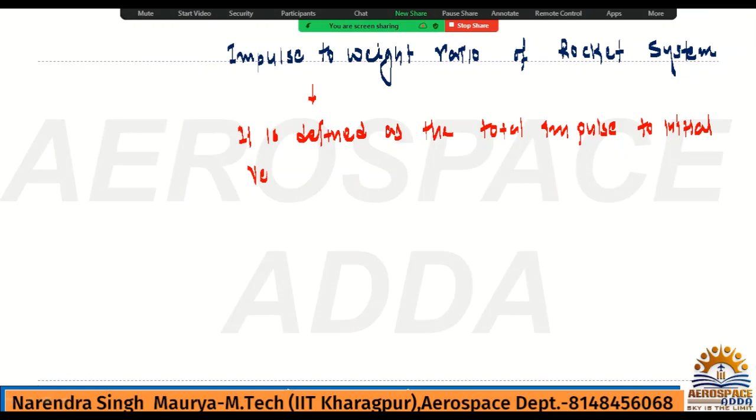So it is defined as total impulse to initial vehicle weight. Okay, so if I say initial vehicle weight, that means that rocket is now going to lift off. So the propellant of the rocket, you can say it is going to start burning now. It is not yet started, yes or no? So in that case you have to take...

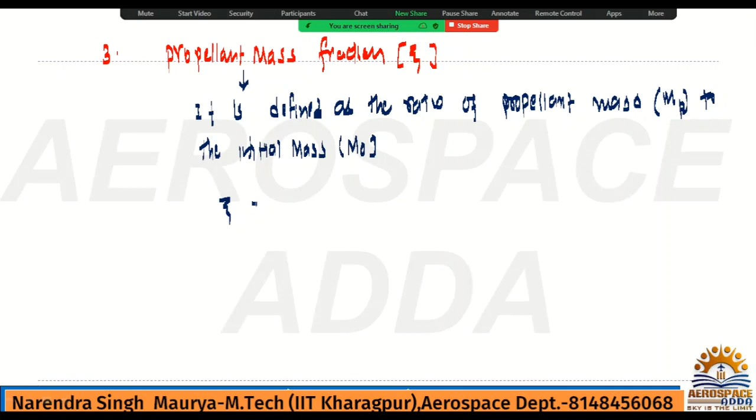So what is the propellant mass fraction? It is defined as the ratio of propellant mass MP to the initial mass M naught. In bracket I can write, propellant mass is MP. So zeta is nothing but mass of the propellant divided by initial mass of the system.

What is the mass of the propellant? Here you can check. Mass of the propellant MP will be M naught minus, in bracket, ML and MS. Yes or no? Or in other words you can say it is MF. MF is the final mass after rocket operation.

Even though after rocket operation we will have mass of the payload and mass of the structure, yes? We are considering that payload is not launched. Don't think that after rocket operation we have pushed the payload, like a satellite, into orbit. No, just think of it as before rocket operation and after operation mass, related to the mass of propellant.

If I say before rocket operation, it means mass of propellant is still there, not completely consumed. If I say mass of the system after operation, it means the propellant is completely consumed. That's the meaning of it. So MP will be 0 at that time.

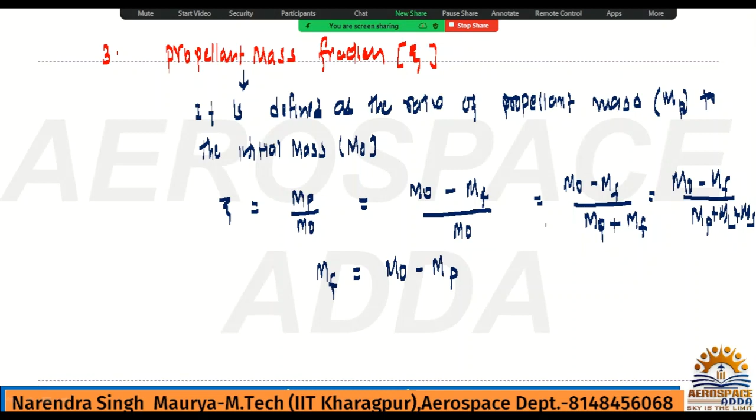What is the initial mass? Initial mass is nothing but mass of propellant plus mass of payload plus mass of structure, or you can write MP plus MF. Because final mass is nothing but initial mass minus mass of propellant, since that part is deducted after operation, as the propellant is now completely consumed. So remember, final mass is always initial mass minus mass of propellant. So wherever mf is written, that is its meaning.

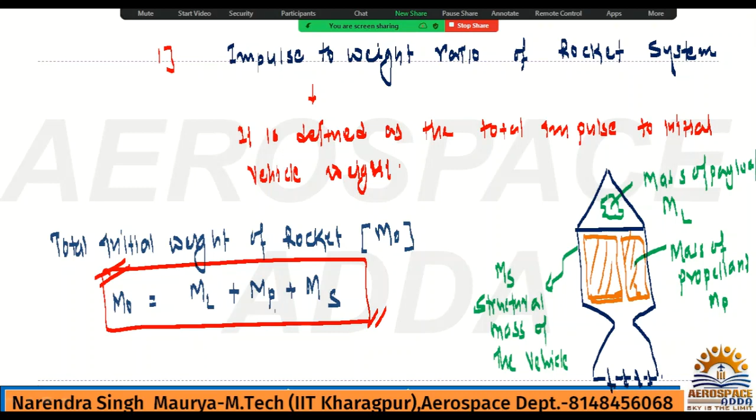M naught is nothing but mf plus mp. So this part here I have written this. This initial mass, you also know very well, it is nothing but mass of the payload plus mass of the propellant plus mass of the structure. So what is m naught? Ml plus mp plus ms. So the same thing I have written here also. This thing needs to be careful, otherwise while solving numericals you may get so much confusion. Each and every line you need to understand.

Now another format also you can have, because from a numerical point of view this is very important - the propellant mass fraction. What I told you is that propellant mass fraction is nothing but mass of the propellant mp divided by the initial mass of the system, m naught. And mp is nothing but m naught minus mf. So it is m naught minus mf divided by m naught.

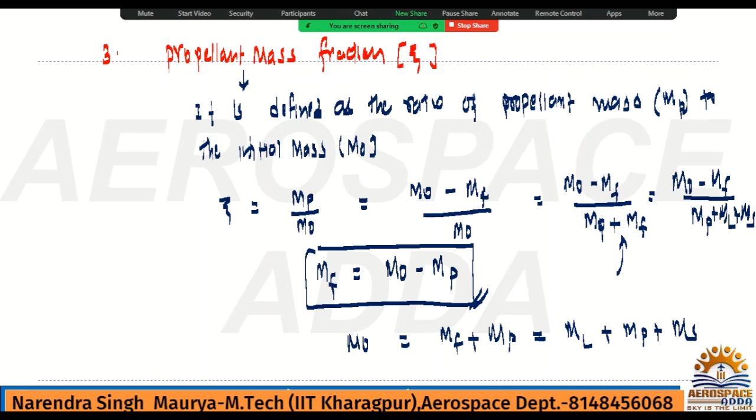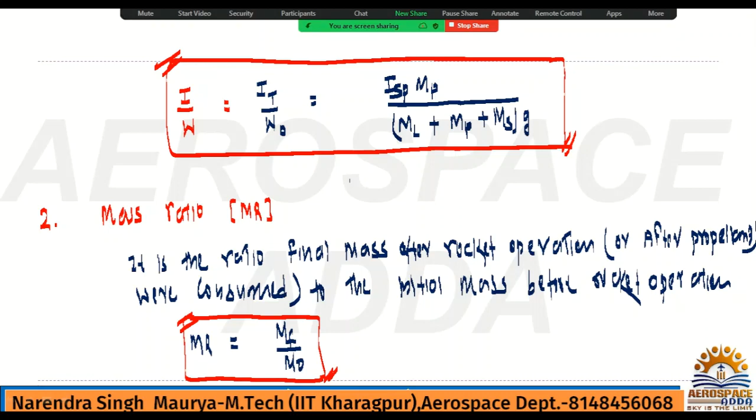Now here you can break it again, and you will get one more formula. Taking m naught by m naught separately, if we check, it is nothing but 1 minus mf by m naught. So zeta is nothing but 1 minus final mass by initial mass. Check what is final mass by initial mass - mf by m naught is nothing but mr, which is called mass ratio. So this is 1 minus mr.

This is very important - a very important result, and it is very useful for numericals. Numericals based on this are 100% asked in one day exams. If you go for separate exams like ISRO or GATE, you may get numericals based on these formulas. Whatever I'm explaining is very important for all exams.

So zeta is nothing but 1 minus mr, where zeta is propellant mass fraction and mr is mass ratio. Now you can see that mr is always less than 1. Why? Because m naught is always greater than mf. What is m naught? It is before operation, so mass will definitely be more since propellant mass is still there, but mf is after burning. So it is very important - mr is always less than 1, and you can draw the plot also.

Plot is not required, but you can draw it if you want. This is the propellant mass fraction, and it is always positive. Based on variation of mr, you can draw zeta also, since 1 is constant, so as mr changes, zeta will change, so you can draw the plot. For the one day exam, definitely graph-based questions will not come, but during your BTech semester you might have solved numericals based on such plots. Here it is not required actually. Anyway, this is what propellant mass fraction is.

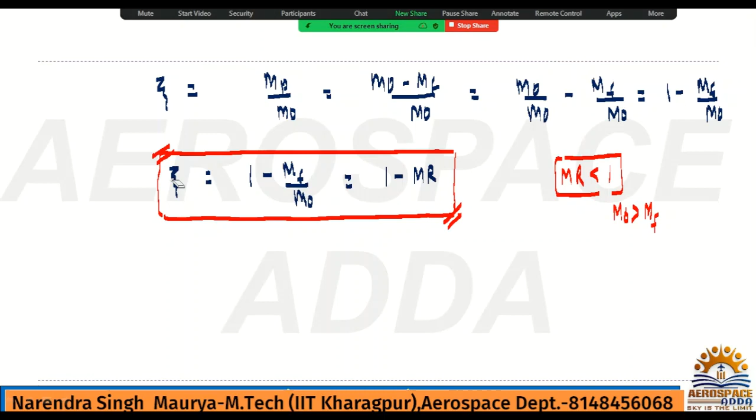Now we'll go for the next topic, but first there's one problem we need to solve here, and then we'll move on. So we have a problem based on this performance parameter - this is problem number 1.

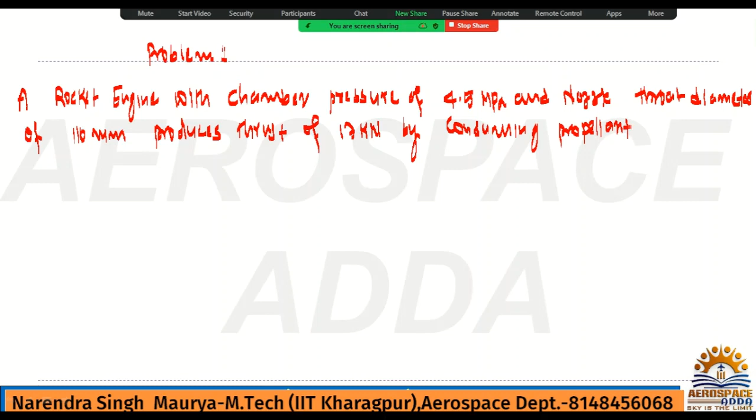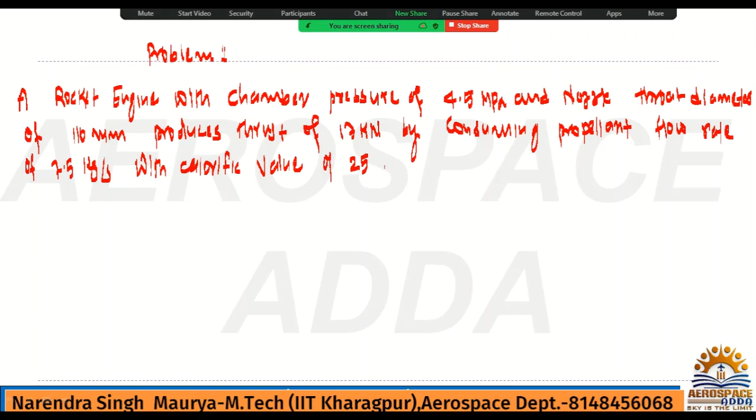A rocket engine with chamber pressure of 4.5 megapascal and nozzle throat diameter of 110 mm produces a thrust of 17 kilonewton by consuming propellant at a flowrate of 7.5 kg per second, with a calorific value of 25 megajoule per kg. If the flight velocity happens to be 850 meter per second,

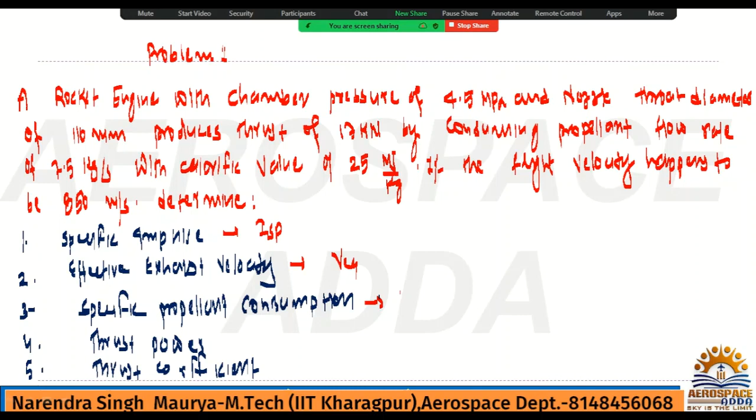determine: number 1, specific impulse; number 2, effective exhaust velocity; number 3, specific propellant consumption; point 4, thrust power; point 5, thrust coefficient. You know specific impulse is denoted by ISP, effective exhaust velocity, SPC, thrust power - TP, and CF. Thrust power you can also say FP if you want, it's your choice.

Check here: 4.5 megapascal is given - chamber pressure is 4.5 megapascal. Throat diameter, you can say DTH, is 110 mm. The thrust they have given to us is 17 kilonewton, and mass flow rate of propellant m dot p is given as 7.5 kg per second, not 17.

7.5 kg per second. Okay, calorific value means here they have given us CV, that is the calorific value, which is nothing but 25 megajoule per kg, and last is the flight velocity they have given us. It is how much? 850 meter per second.

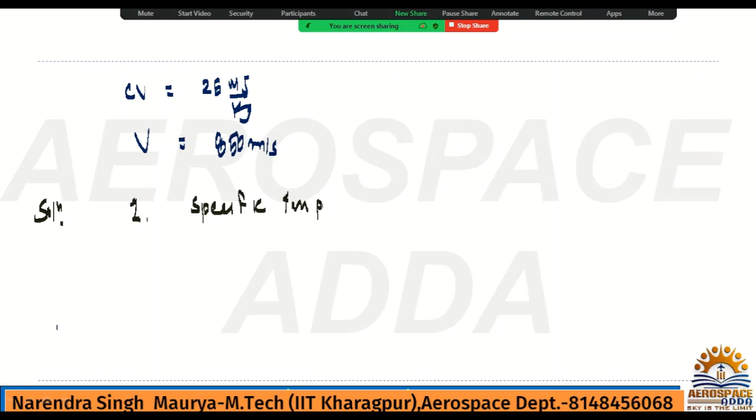Okay, so now the solution for this problem is simple. Number one, what is number one? It is specific impulse. What is the formula for this? It is ISP. ISP is thrust F divided by m dot p into g. What is the thrust? It is given as 17 kilonewtons, so 17 into 10 power 3.

M dot p, mass flow rate of the propellant, is given as 7.5. G they have not given, but you can consider 9.81. If you solve this, approximately you will get 231.06 seconds. So this is the ISP. This is number one.

All right, now we'll go for number two. What is number two? It is nothing but effective exhaust velocity. So what is the effective exhaust velocity? As you know, it is nothing but ISP into G. Check that formula box I had given, where many formulas were there. I had given ISP is equal to V equivalent or effective velocity by G. So what is V effective? It is ISP into G.

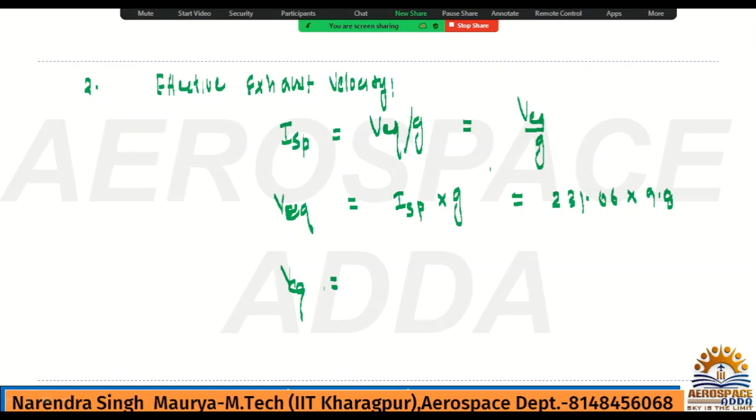So what is V effective now? V effective is nothing but ISP into G. What is the ISP? You calculated 231.06, into 9.8. If you do this calculation, approximately you will get 2266.7 meter per second. This is the value.

Please check the value of this formula. If you remember, we had proved ISP is equal to F divided by m dot p g. If you check F divided by m dot p into g, what is F? F is nothing but V equivalent or effective into m dot p, divided by m dot p into g. M dot p cancels out. So what you will have is ISP is equal to V effective by G. So you use that formula. Okay, it is very tough for me to remember the formula, but anyway.

Alright, so this second value you have calculated. Now we'll go for the third value. What is the third value? Third value is specific propellant consumption, it is nothing but SPC. What is the SPC? I had given one formula, it was very large in the box, many formulas I had given for SPC, but finally if you remember it was 1 upon ISP. What is the ISP here? It is given as 231.06. If you solve this, what you will get is 0.0043 kg per Newton second. This is number 3.

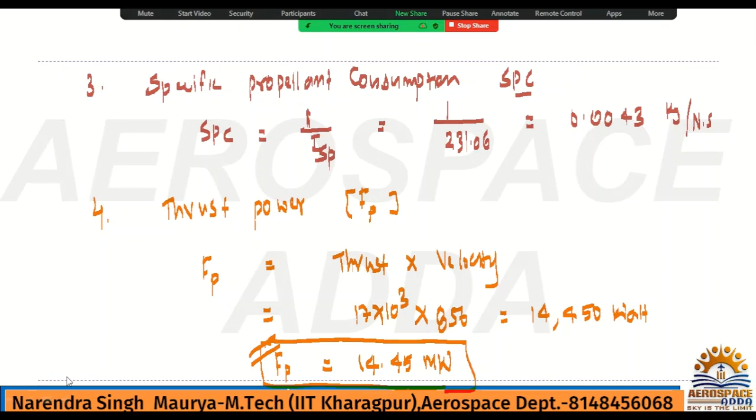This is number 4. Now we'll go for number 5. So what is number 5?

Number 5 is thrust coefficient, CF. By formula, CF is nothing but thrust force divided by PC into ATH, throat area. What is the thrust force? It is 17 kilonewton, given to us. Check 17 into 10 power 3 divided by PC.

If I am not wrong, it was 4.5 megapascal, check it. And diameter is given as 110 mm. So we'll write 4.5 megapascal, so 10 power 6 into area, which is pi by 4 into diameter 110. Convert 110 mm into meter, so it is 0.11, pi by 4 d square. If you solve this, you get 0.3975.

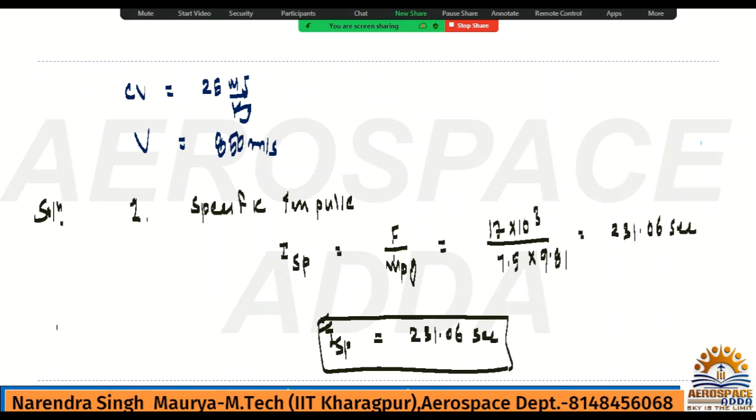One more you can add here in the problem itself. Number 6, very interesting actually. It is C star, we need to find C star. What is number 6? Characteristics velocity.

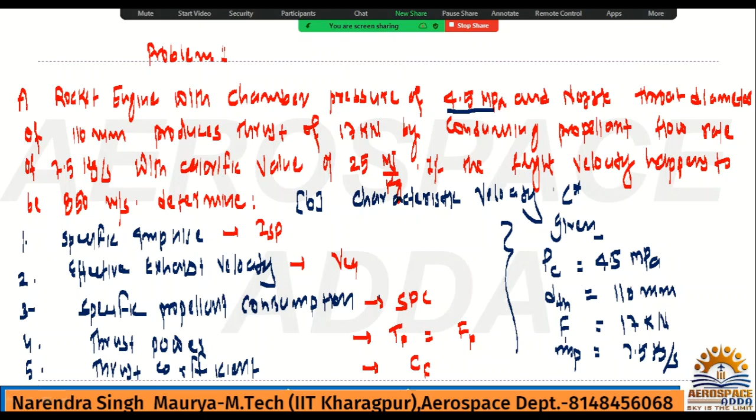C star we need to calculate. So number 6 is nothing but characteristics velocity, C star. Check as per given data what we have found yet. So what is the C star? Many formulas I told you yesterday, I had given all the parameters. These 6 parameters you have calculated, and all 6 parameters I had explained in my last lecture. So if you check there, C star in different format was given in different terms.

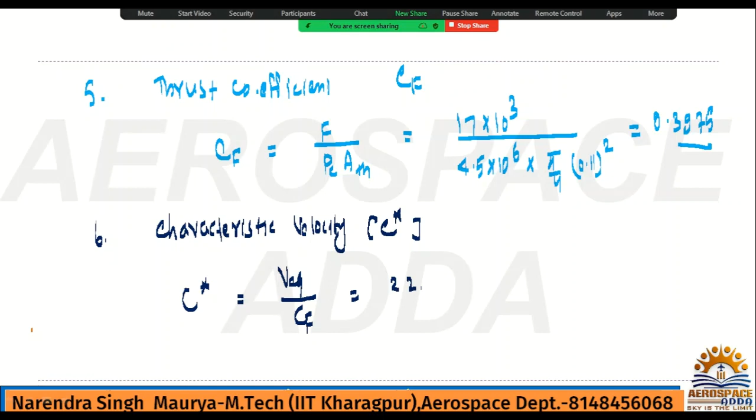So one it was V effective divided by CF. If you check this formula is available or not, this one you can use because V effective you have, and CF you have. What is the V effective? V effective you have, 2266.7. So it is 2266.7 divided by 0.3975. If you solve this, then you will get 5698 meters per second. Done.

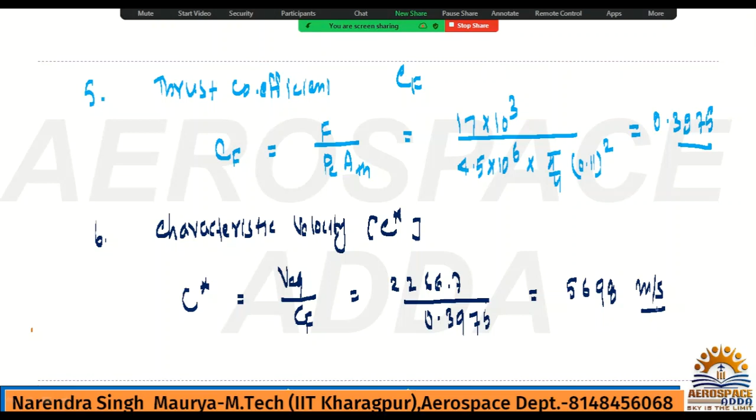So if you go for the efficiencies, we have two efficiencies, and it is nothing but thermal efficiency and propulsion efficiency. It is denoted by eta P and eta TH.

So in the similar way what you had seen for jet propulsion, same way we can write the efficiency formula for rocket propulsion. So here I am going to write directly this formula: eta TH, it is nothing but V equivalent square plus V square divided by 2, combustion chamber efficiency into heat value.

One more thing I want to add here: this thermal efficiency is basically, in words, it is nothing but engine power output divided by available chemical power developed by combustion. So in words also now you have the formula, how it comes.

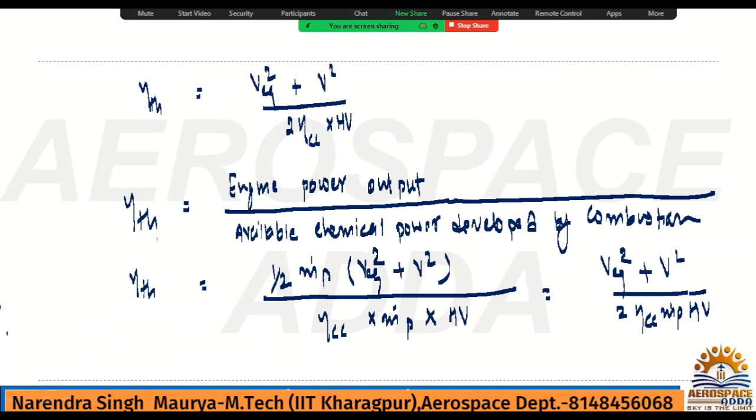Okay, sometimes the source is required to know actually, so what is the source, that source you should know. In between steps you can remove, no problem, but at least the source you should know. So what is the source? This is the source. All right, fine. This is what thermal efficiency is. In the same way, we can go for the propulsive efficiency.

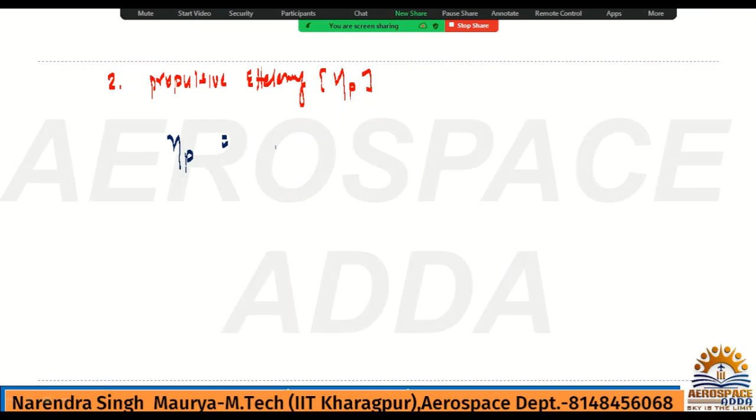So point 2, propulsive efficiency. Just like in jet propulsion we had seen propulsive efficiency, we have propulsive efficiency for rocket propulsion also, the rocket system. First I will write in words: eta P is nothing but propulsion power or thrust power based. I will write thrust power, thrust power divided by engine output power.

Engine output power. Thrust power divided by engine output power. If you solve this, after getting all the manipulation in 2-3 steps, the final formula is 2 into V divided by V equivalent, divided by 1 plus V upon V equivalent square. In a similar way we had seen for jet propulsion also, there was something different but similar. So it is eta P. In jet propulsion this square was not there, rest everything is same. So it is nothing but 2 into sigma divided by 1 plus sigma square.

In jet propulsion it was 2 alpha divided by 1 plus alpha. What is sigma? It is nothing but speed ratio. This is called propulsive efficiency. What is sigma then? Sigma is nothing but V upon V equivalent, called speed ratio. That's all, done, you need to remember.

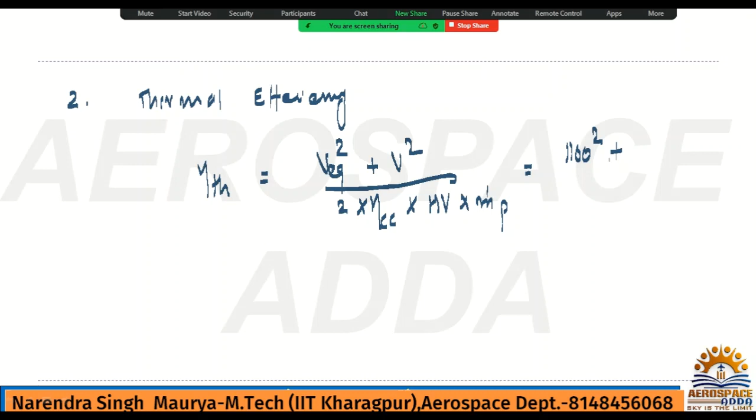So if you check here, V equivalent is 1100, plus flight vehicle speed is 236.11, divided by 2. Combustion chamber efficiency is not given, so consider it 100%, so it is 1. Heat value is 43 megajoule, and mass flow rate of propellant is 6 kg per second. So if you calculate this thermal efficiency...

Yes, this one is approximately 7.89%.

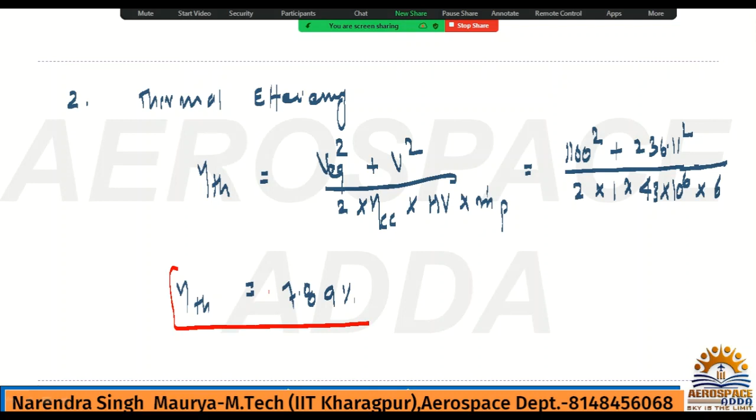Fine, what is the third one? Eta O. As I explained in jet propulsion also, eta O is nothing but thermal efficiency into propulsive efficiency. What is the thermal efficiency? 7.89. So you can write 0.0789 into what is the propulsion efficiency? It is 0.766.

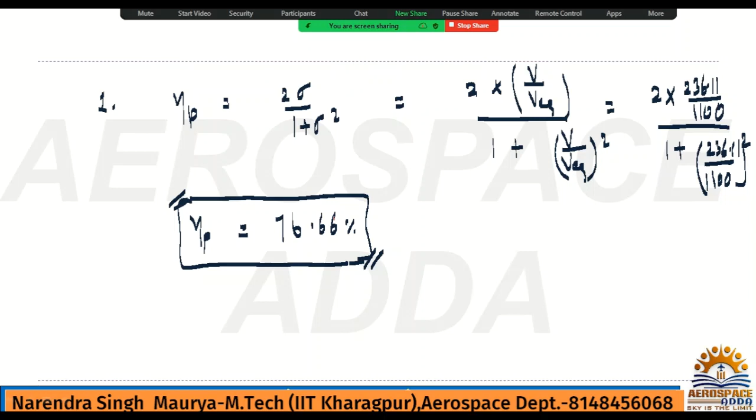If you do this overall efficiency calculation: 0.0789 into 0.766, so it is 0.06043, but in percentage, multiply by 100, so you get 6 point something. This is the propulsion efficiency, overall efficiency. Alright, this is the overall efficiency. Nice.

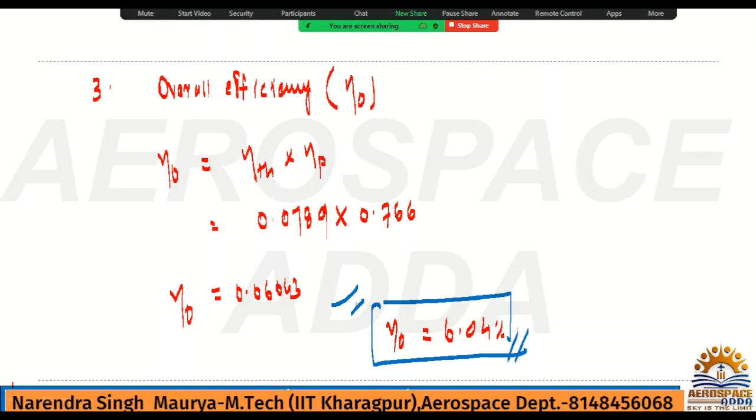Done. So, rocket engine, this is problem number 1.

Okay, now check this problem here. A spacecraft...

Dry mass, see a new word came here, so I will explain. Once you are solving numerical problems, if you get new terminology, you need to understand it, because different problems use different terminology. So dry mass is 75,000 kg.

And the effective exhaust gas velocity of its main engine is 3,100 meter per second. How much propellant...

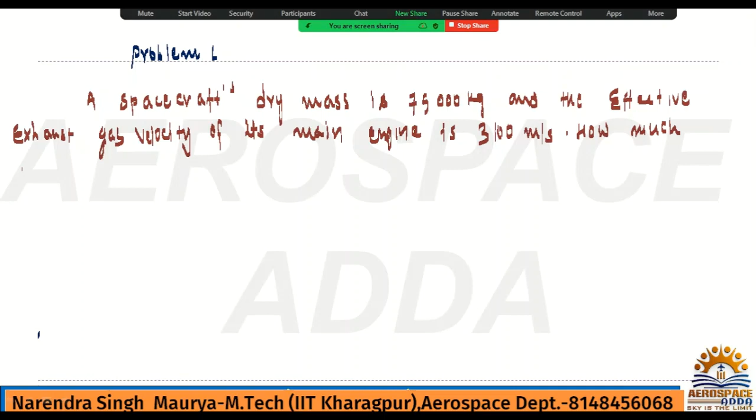...must be carried if the propulsion system is to produce a total delta V of 700 meter per second. All right.

Now to check, they have given spacecraft dry mass. So dry mass, it is also called burnout mass or final mass. I explained already what is the final mass. So final mass they have given as 75,000.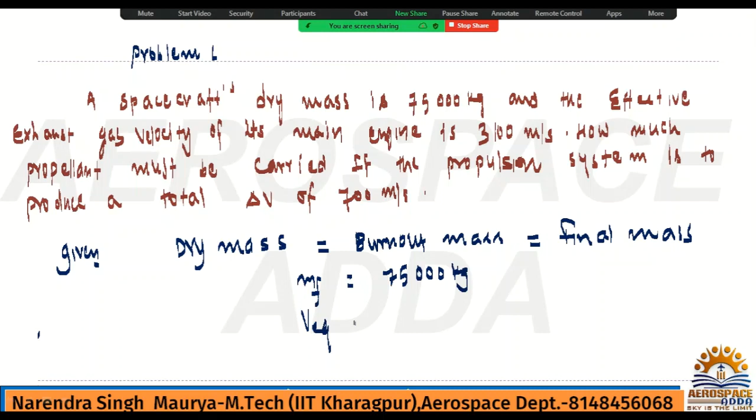In one previous numerical, I think I had calculated velocity as 231 something, but that was a calculation mistake. Please, once you are calculating any value, cross check and then tell me that value. Anyway, 75,000 kg, and effective exhaust velocity is given as 3,100 meter per second, and delta V is given here.

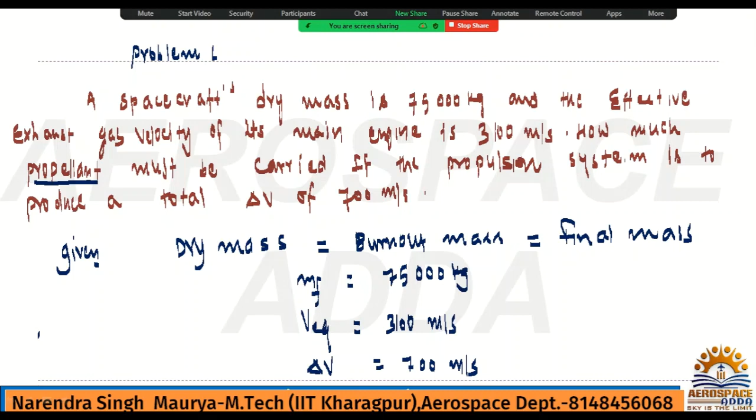They are saying calculate how much propellant must be carried. So they are asking the amount of propellant. We need to find propellant mass, not mass flow rate, propellant mass. So what formula do we have? Change in velocity formula.

We have a change in velocity formula, which is nothing but delta V. It is V equivalent ln 1 upon mr. I can also write this formula as ISP times g times ln 1 upon mr. But in the problem, effective exhaust velocity (equivalent velocity) is given, so I will use V equivalent ln 1 by mr. And mr, you know very well, is the formula mf divided by m naught.

Or you can say V equivalent ln m naught by mf. If you check, this is what delta V is. What is m naught by mf? It is nothing but e to the power delta V by V equivalent. Or you can say m naught is equal to mf times e to the power delta V by V equivalent. This was the derivation, and I had already derived it before.

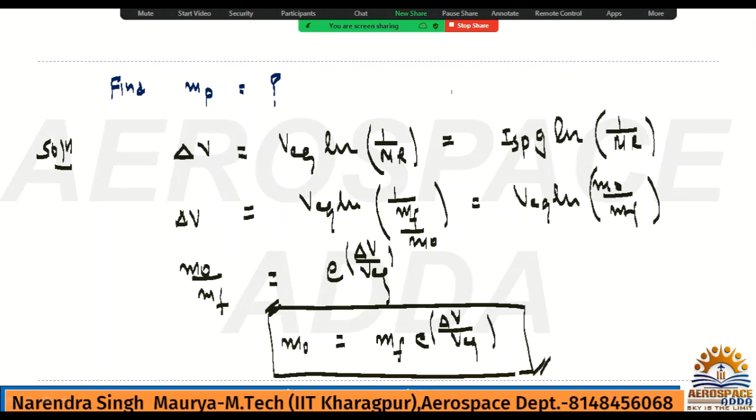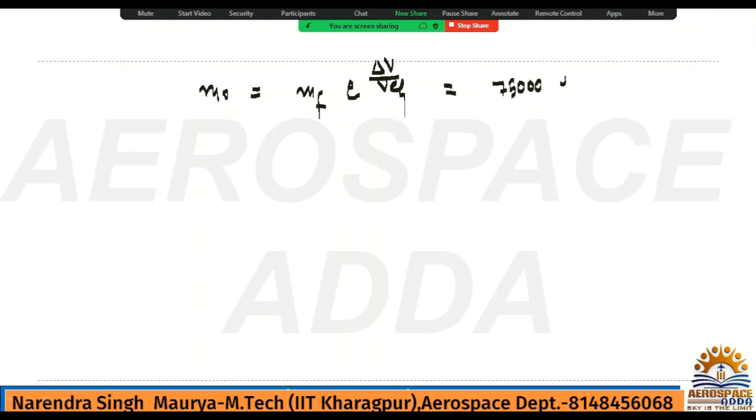I derived it, but again here I have given it because I don't remember the formula exactly. So m naught you have now: mf e to the power delta V divided by V equivalent. Everything is given. mf, what they have given? Check mf, it is 75,000. So keep all values here: e to the power delta V, they have given 700, divided by V effective exhaust velocity, they have given 3,100. Calculate this value.

If you calculate, this value comes out to approximately 94,000 kg. This is the initial mass of the rocket system.

So what will be the mass of the propellant? It is MP, and what is MP? I told you in the previous lecture, m naught minus mf, initial minus final mass. So you will get the amount of propellant. What is the initial mass? It is 94,000 minus the final mass, which is the dry mass, 75,000. If you do this, you will get approximately 19,000. So this is the mass of the propellant.

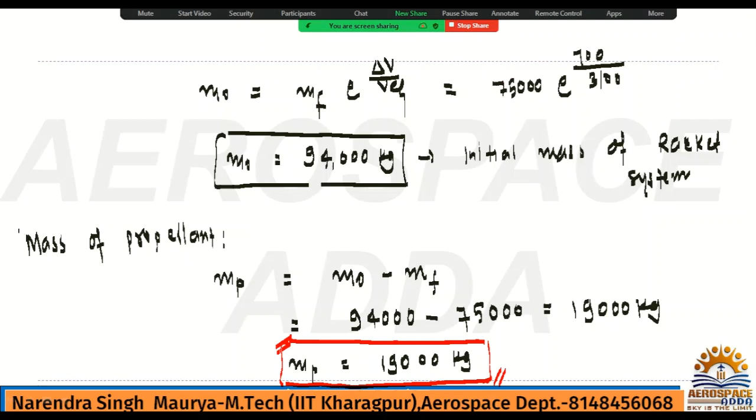So now we'll go for the next problem, problem number 2. This is quite a good question.

A rocket vehicle has the following data. Okay, so need to check this.

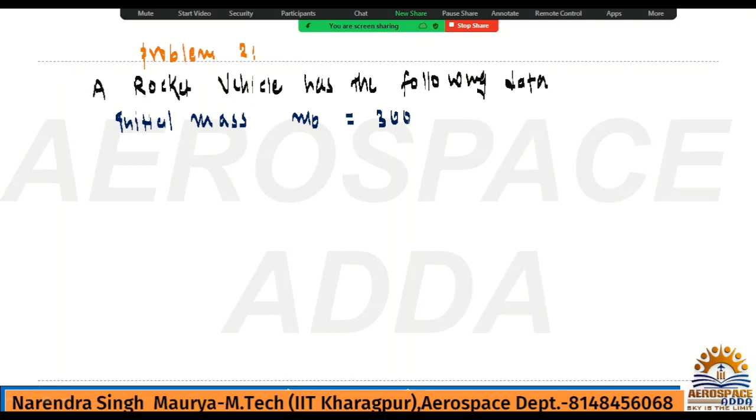They have given initial mass. Our notation for initial mass is m naught. How much is it given? 300 kg. It's a very small rocket, initial mass.

Then they have given final mass. What is the final mass? It is 180 kg.

Then they have given payload mass. In our notation, what is the payload mass? ml. How much is it given? 130 kg. Burn duration.

It is also called burning time, denoted by TB. Burn duration given is 5 seconds. Then specific impulse, denoted by ISP, is 280 seconds.

We need to determine: number 1, mass ratio (MR); number 2, propellant mass fraction (PF, also called zeta); number 3, propellant flow rate; number 4, thrust to weight ratio; and impulse to weight ratio, which is total impulse divided by weight. These are the data we have to calculate.

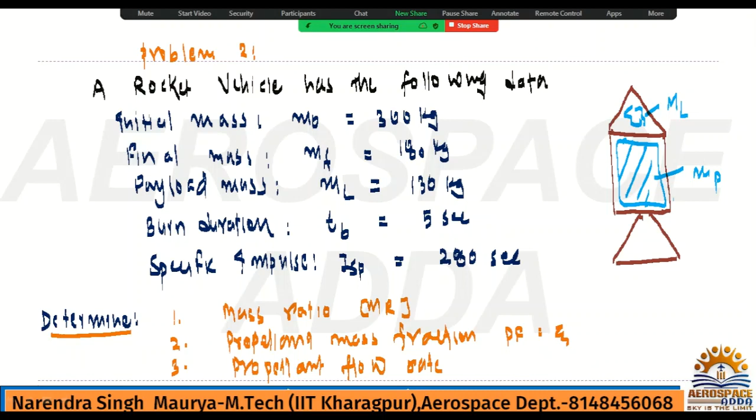Now we'll go for the solution. As per the given data, for this rocket we can say this is ml, the mass of the payload. This is the mass of the propellant. The initial mass is m naught.

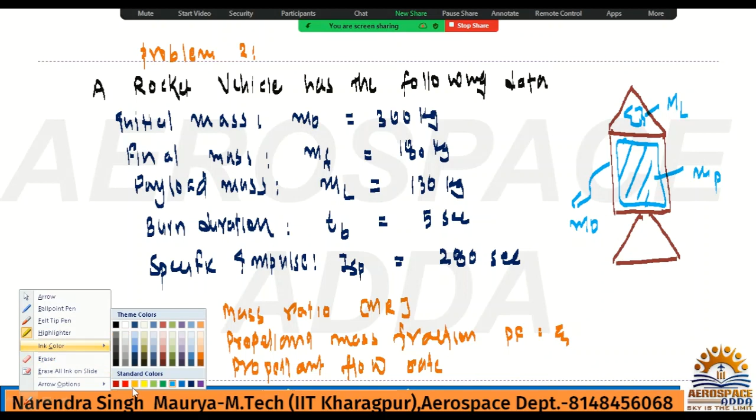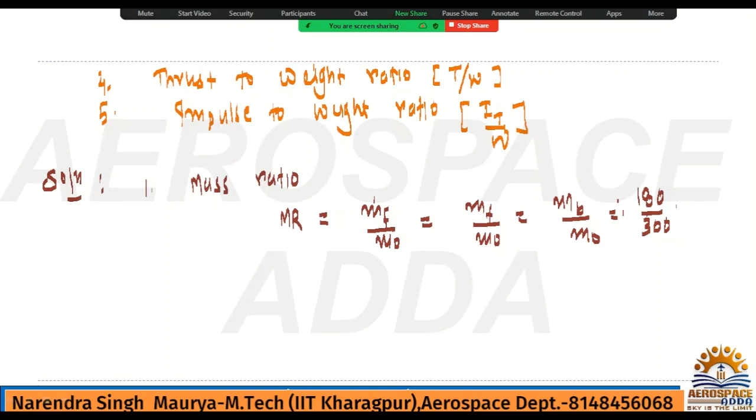Now check the solution for this problem. First we need to calculate mass ratio. Mass ratio is nothing but mf by m naught, or mb by m naught. Final mass given is 180 divided by 300, which is 0.6. So MR is 0.6. This is the first answer.

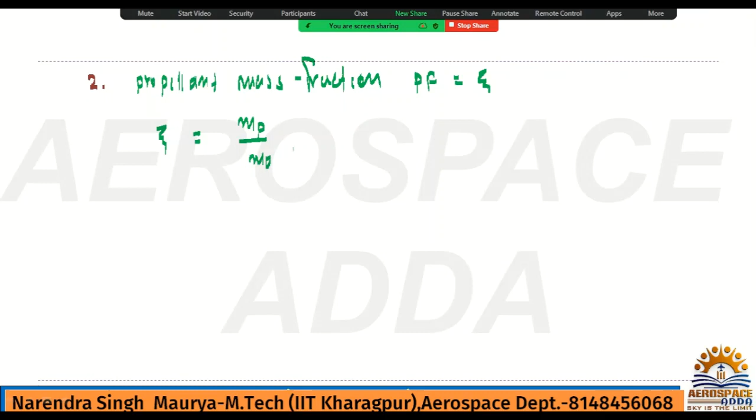Then second, what do we need to calculate? It is propellant mass fraction, called PF or zeta. It is mass of propellant divided by initial mass, which is m naught minus mf divided by m naught. Initial mass given is 300, minus final given 180, divided by 300. If you solve this you will get 0.4. Please keep calculating correctly, you will get the data.

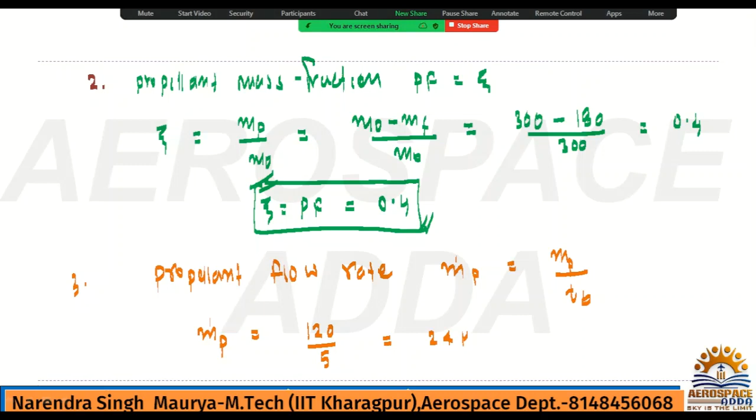Now the third point is propellant flow rate, m dot p. It is mp, mass of propellant, divided by burning time. The mass of propellant calculated is 300 minus 180, which is 120. So 120 divided by burning time, which is 5, gives 24 kg per second. This is the propellant flow rate.

What is mp? It is simple: 300 minus 180 divided by burning time. And what is the burning time? If you check in the problem, it is given as 5 seconds.

Now moving ahead to the next point, the fourth point: thrust to weight ratio, or F by W.

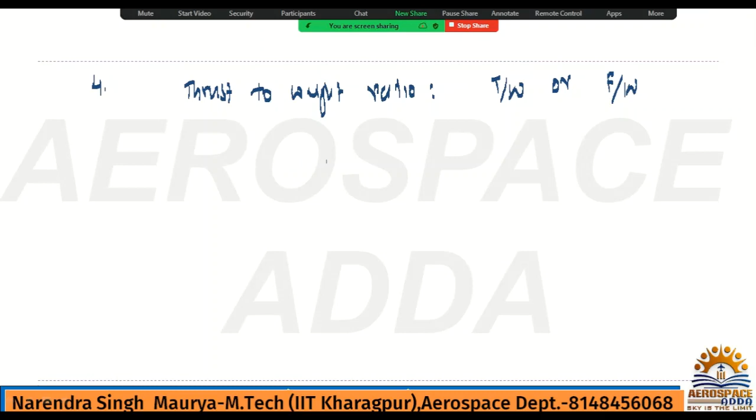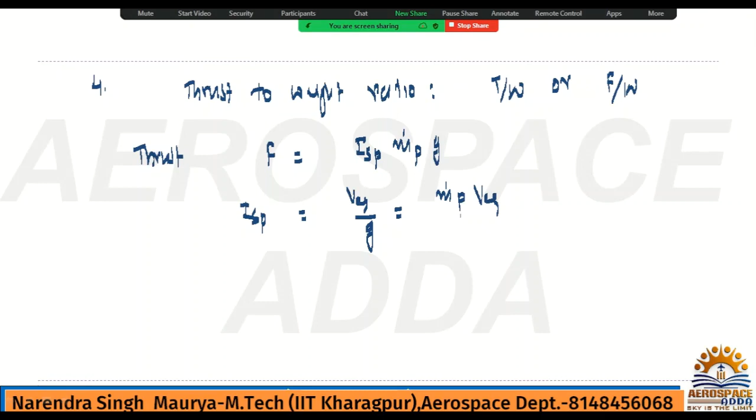So how to get thrust? If you remember, among the many formulas I had given, F equals ISP into m dot p into G. Actually, ISP I had given in a full box, where it is V equivalent by G, or m dot p into V equivalent, meaning multiply and divide, so m dot p into G. This m dot p V equivalent is nothing but thrust F divided by m dot p G. So here ISP is given, so I will use this ISP to get thrust.

What is the thrust formula? ISP into m dot p into G. G is not given, so consider 9.8. ISP value is 280 seconds, and m dot p calculated is 24 kg per second, into G 9.8. Calculating this, the thrust value you get is 65856. This is basically the thrust. Since thrust is a force, you write it in Newtons because you multiplied by 9.8. So this is the thrust.

What is thrust to weight ratio? So for weight, how will you get the weight of the rocket system?

What is the weight of rocket system? It is W, and weight of rocket system is the mass, initial mass basically. Okay, initial mass m naught.

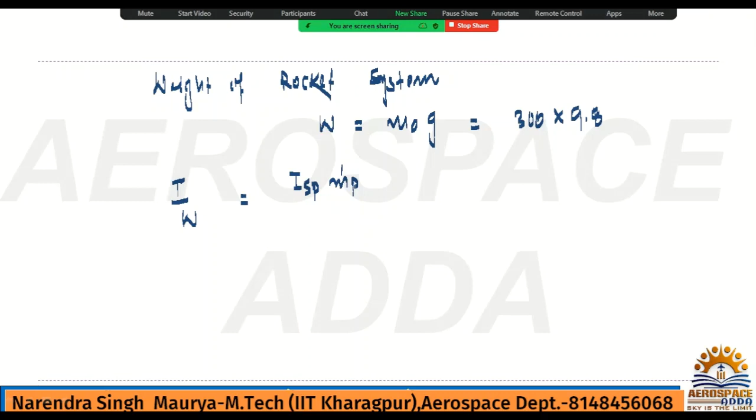See, this is nothing but ISP. Again I will write this, ISP m dot p into G, okay, divided by weight is nothing but m naught into G. So this G cancels out, so what we will have? ISP m dot p divided by m naught.

So thrust to weight ratio, it is ISP, I think it is 280. So 280, m dot p is 24 kg per second, divided by initial mass is 300. If you calculate this value, so...

So total impulse, if you check, it is nothing but ISP into MP into G, and weight is nothing but total weight, which is m naught into G. So in notes, previous class I had explained impulse to weight. There, in numerator, I forget to multiply by G, but actually G will be there, so please correct that. So G cancels out.

Now here it is ISP MP divided by m naught. So what is this total impulse? It is ISP. What is ISP? 280 into mass of the propellant, not mass flow rate, mass of the propellant. So what is the mass of propellant? I think it is 120. Mass of propellant is 120, divided by total initial mass, which is nothing but 300. So if you do this, it's 280 into 120 divided by 300.

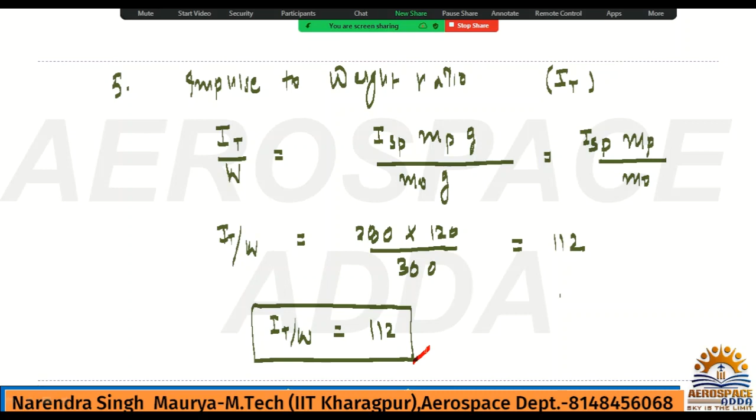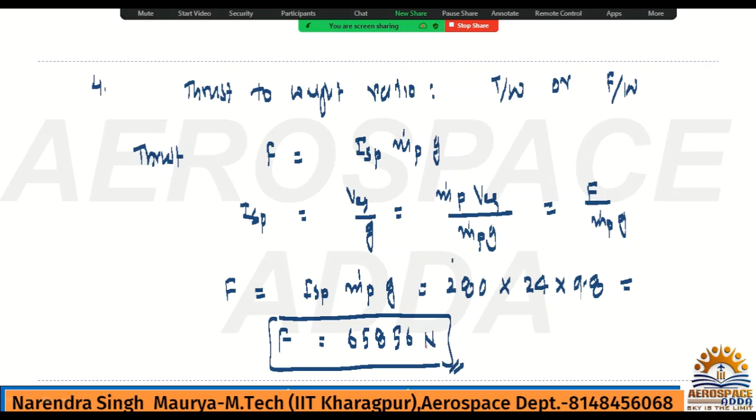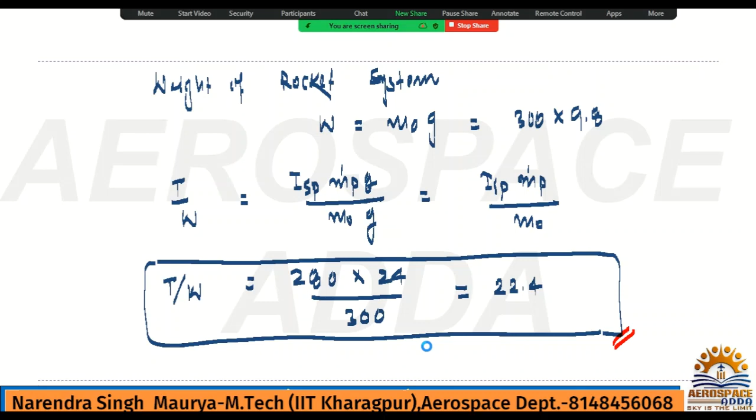So all the data what we have calculated, this is 6, this is 5, and fifth point. And this is what? Fourth one is here, 3 is here, check, match all the answer, and 2 is here. Then this is the first. Done. Fine. So this problem, hope you all understood.

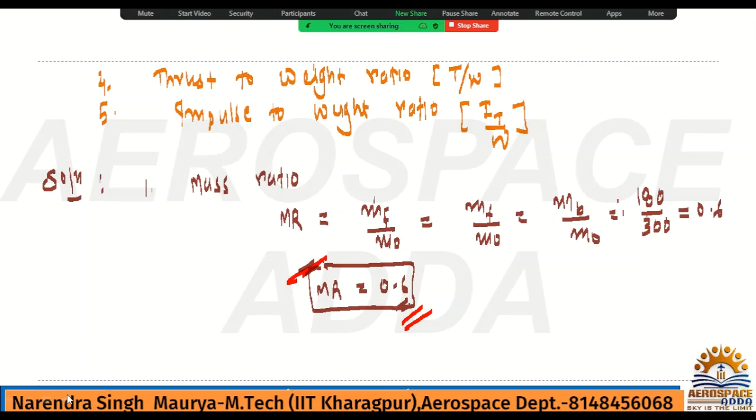Now we'll go for next problem, and it's very formula based problem. Okay, all rocket propulsion problems are formula based only. So now this is problem number 3.

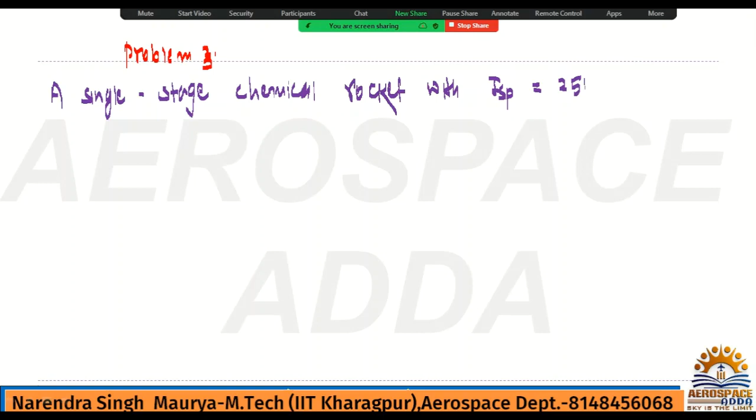So now, a single stage chemical rocket with ISP, specific impulse, 250 second, is designed to escape with the following mass.

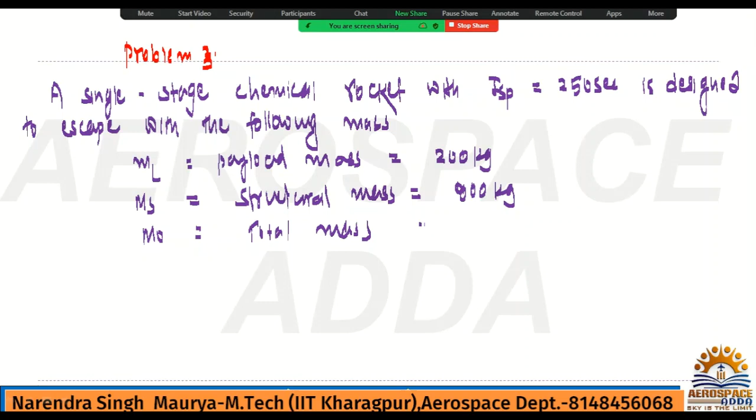Here they have given ML. What is the ML? Payload mass. How much? It is 200 kg. MS, structural mass. How much? 900 kg. Total mass, or you can say initial mass, total mass, it is given 30,000 kg.

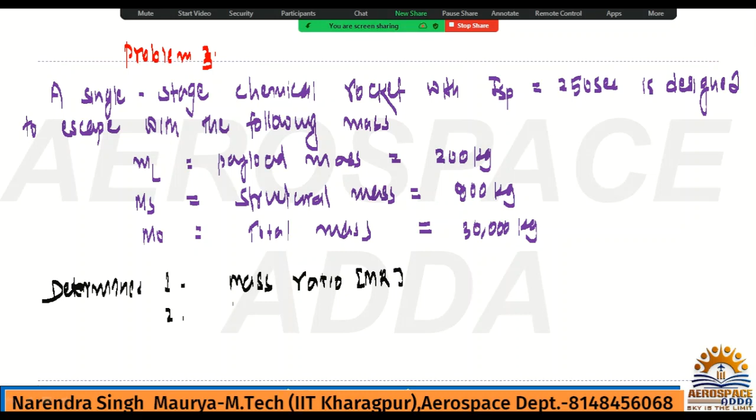Determine number 1, we need to calculate mass ratio. Mass ratio means MR. Second one, velocity increment, it is delta V. Third, payload fraction. Payload fraction, what I remember, I think it was denoted by this symbol, lambda. Fourth is structural fraction, I think it was denoted by delta.

And it is clearly mentioned assumed. They said no drag, no drag loss, and no gravity loss. Okay, done. I hope this one is very clear to everybody.

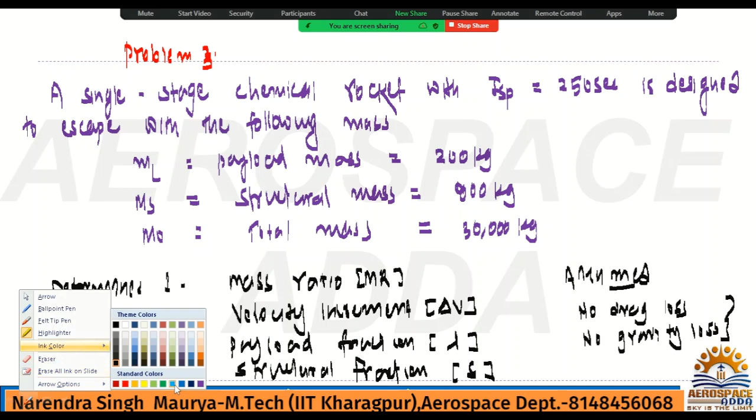Now we'll go and calculate this. It's very nice, very simple problem. So number one, they are asking mass ratio. What is MR? MR is nothing but MF divided by M naught, or sometimes it is called MB, burnout mass, divided by M naught. What is the final mass? Final mass, if you remember, it is M naught minus MP divided by M naught. Check, propellant mass, they have not given for this problem.

So again, one more thing, if I will write initial mass M naught, start from payload ML plus propellant plus structure, if you remember, this was the formula. For that reason only, in my previous lectures, I always used to write formulas many times. The same formula I had written many times. Why? Because it should hit in your mind, and at the same time also I can remember. If I am writing again and again the same formula, then definitely I will remember. So this is also the reason why I am writing every time the formulas. M naught minus MP, what is M naught minus MP? It is nothing but ML plus MS.

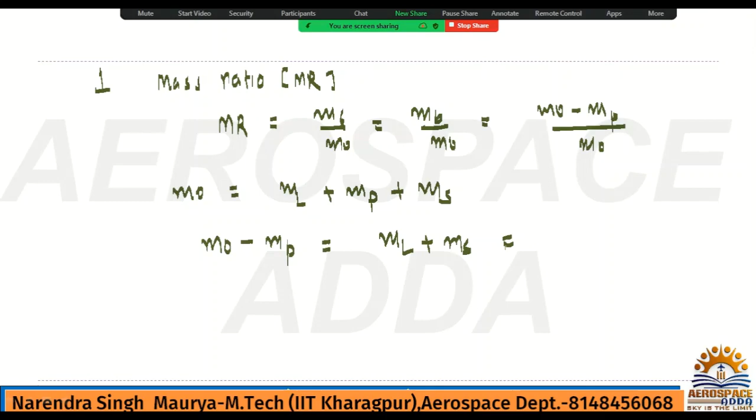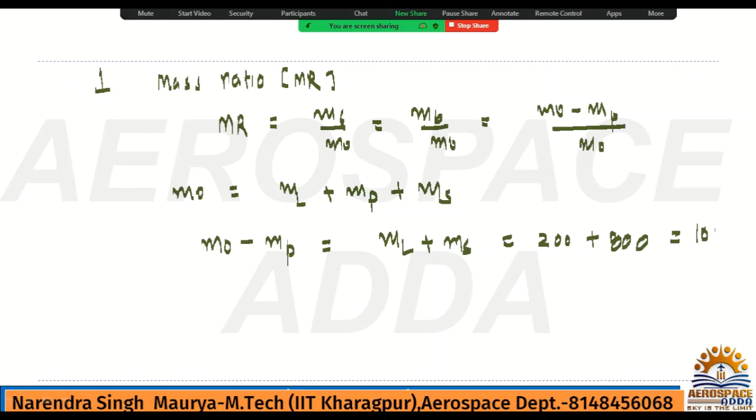If you check, ML, I think given it is 200, and MS is 800. So it is 200 given and 800 it is given. How much? 1000, right? Fine. So what is the mass ratio? It is M naught minus MP divided by M naught, and this M naught minus MP is also ML plus MS divided by M naught, and it is 1000 divided by, what is the initial mass? I think it is given M naught 30,000.

If you solve this, find 1000 divided by 30,000. It is 0.0333. So MR equals 0.033. This is the first answer you got.

Now we'll go for the second one, velocity increment. How to get this? They are asking what is the velocity increment, also called change in velocity.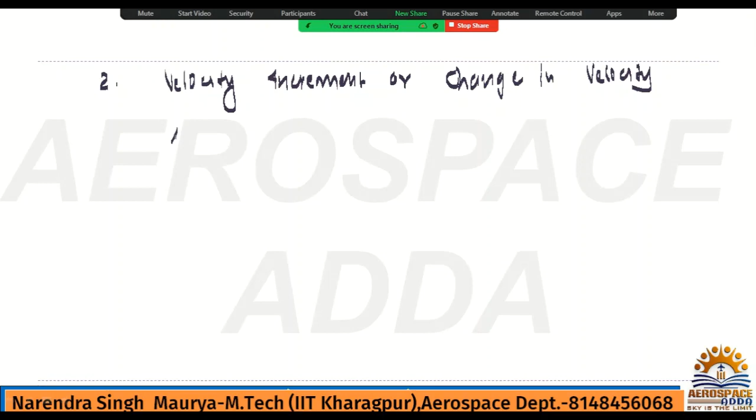So it was delta V. Here clearly they have mentioned no drag loss, no gravity loss, so we have the formula. What is the formula? Simple one: 1 upon MR. Check ISP, I think they have given it to us. ISP here it is given. So the same formula I have given in terms of ISP. V effective exhaust velocity will be ISP into G ln 1 by MR.

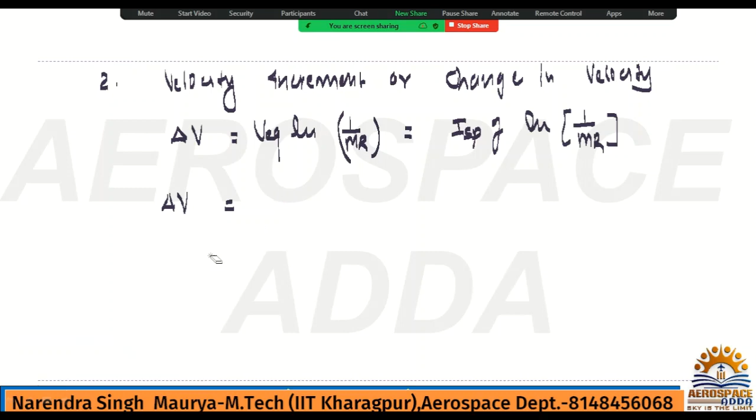So now this delta V, if you write ISP, obviously we'll write the value directly because no need to write the formula again. ISP they have given 250. If G they have not given, take 9.8, ln in bracket 1 upon MR. Just now MR you have calculated.

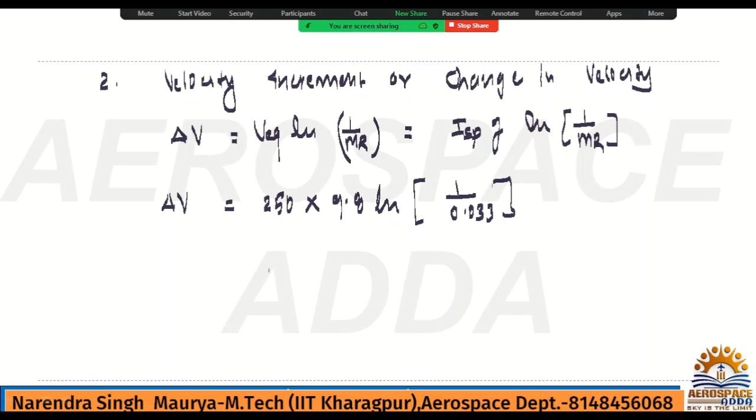So this value delta V, which is also called increment velocity or change in velocity in rocket, is 8,332.93 meter per second. Very nice. So this is the second one, right? And believe me, this type of question they are asking in exam. You solve previous questions, you may get simple formula-based problems they will ask you.

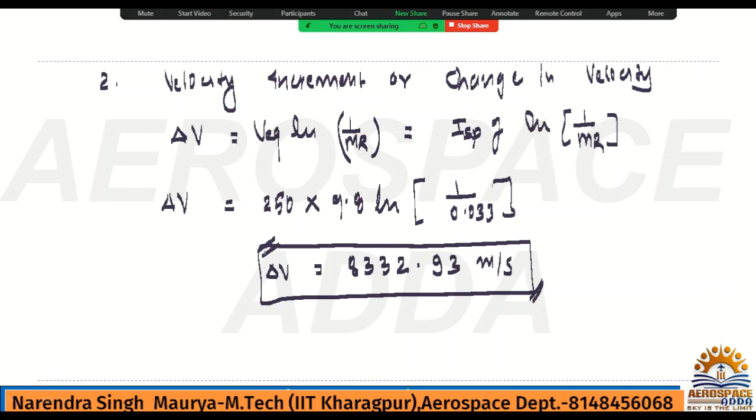Now we'll go for payload fraction. Point 3 is payload fraction. So what is the payload fraction? If I am not wrong, it is lambda. Lambda is nothing but ml by m naught, because it is payload fraction. So payload mass, which is ml, and initial mass m naught, ml by m naught. Here payload mass is given as 200, and m naught is 30,000.

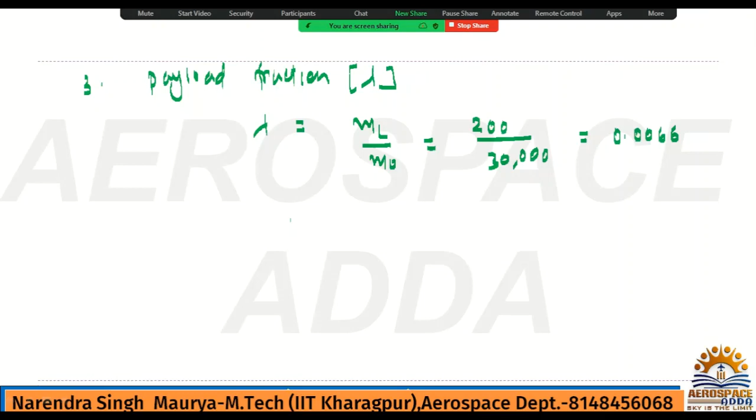So 200 divided by 30,000, how much will you get? 200 divided by 30,000, it is 0.0066. This is the value of payload fraction.

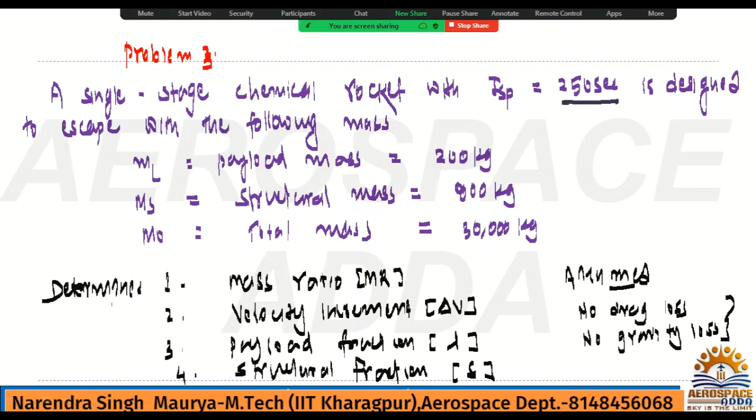Now we'll go for the next, which is point 4, and I think it is the structural fraction, right? Structural fraction. Okay right. So find structural fraction, and it was denoted by delta. What is delta? It is structural fraction, so mass of the structure divided by initial mass.

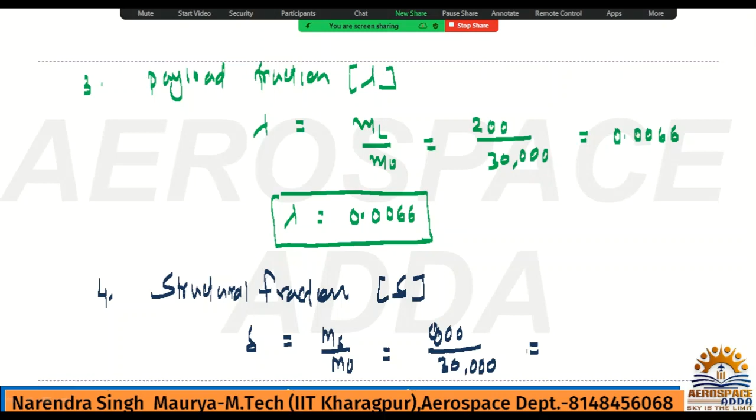Mass of the structure separately they have given to us, so 800 divided by how much? Check. 800 divided by 30,000 is 0.0266. So this is the structural fraction.

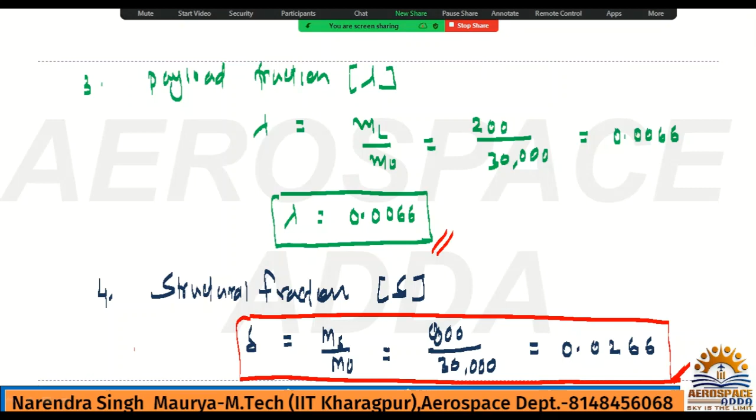This is the payload fraction, change in velocity, and this is the mass ratio. So if you check previous year GATE problems on rocket propulsion, they are asking similar kind of questions. Meaning these are the data and they will say calculate mass ratio, mass fraction, change in velocity, sometimes called incremental velocity, or ISP. Meaning direct formula based; if you know the formula, very easy way you can solve.

Hardly in examination will it take 3 to 4 minutes, because here we are writing each and every step, but in examination directly, few things you have to write and few things you can directly put in the virtual calculator and get that value. So I would suggest for rocket propulsion problems, because it is very easy and formula based, not complicated, and if you put values properly, you will get the correct answer. Keep calm, because numerical will be very easy, formula based only, calculation you need to take care of, because if in a hurry you put wrong values, you will definitely get a wrong answer.

So for rocket propulsion problems, I will suggest, since it is for 2 marks, please keep calm, go slow, calculate properly, and then find the answer. If it is fill in the blank, then fill that data; otherwise if it is objective MCQ, it will be very easy for you. It's a very simple problem only they are asking in examination. So this was the problem.